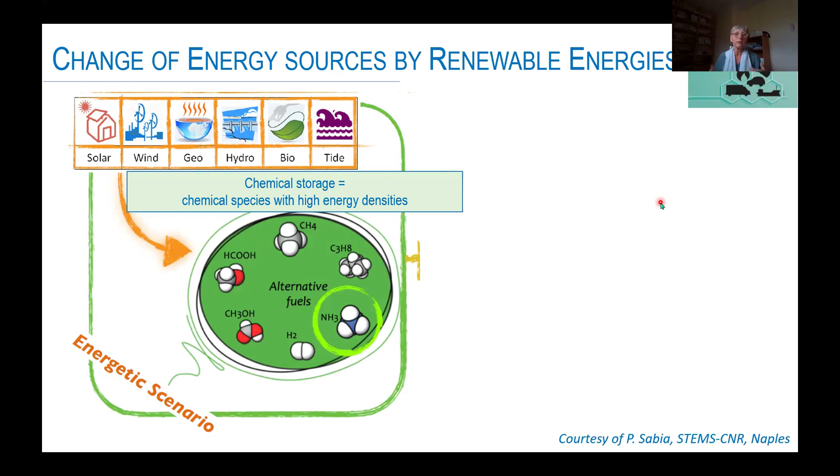So all of you certainly know that chemical storage is very beneficial, because in the chemical species we have high energy densities. From that, we can produce through water electrolysis or some other process that still needs to be developed. We can produce hydrogen or other alternative fuels that we call usually e-fuels, and ammonia is one of them. So the idea, sure, is that from ammonia we can retrieve the hydrogen content and use ammonia only as an energy, as a hydrogen carrier.

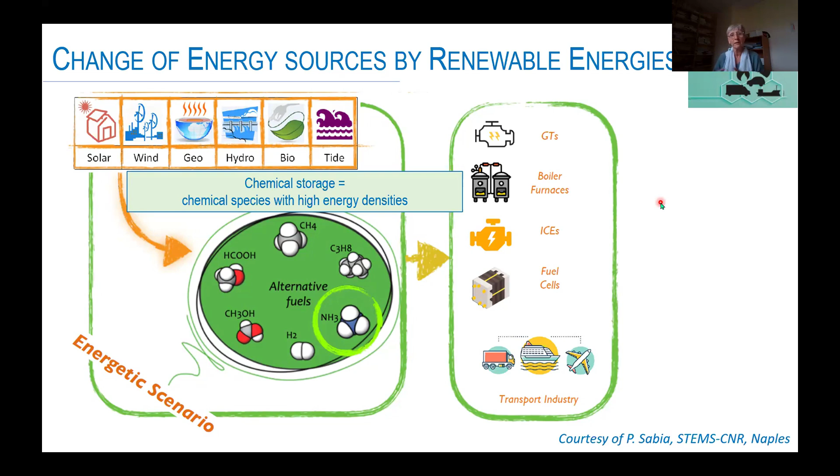But our objective from the combustion community is to use ammonia itself as a fuel. It could be in gas turbines, in boilers or furnaces, internal combustion engines, and there is also some development in order to use ammonia directly in some solid fuel cells.

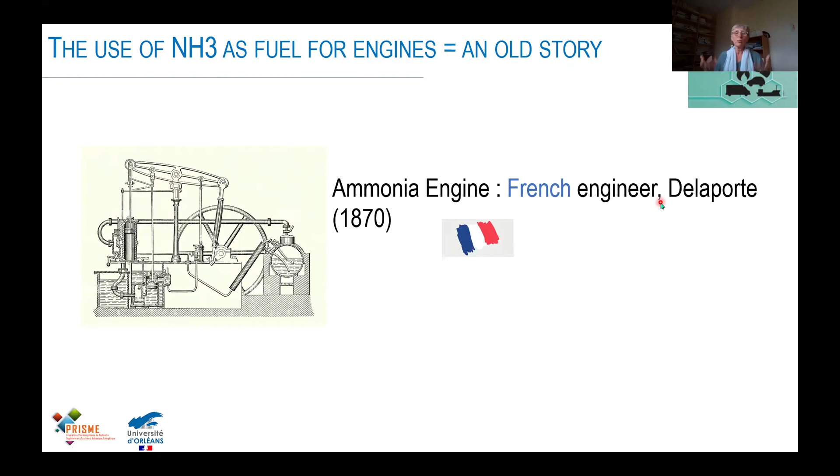Okay, the use of ammonia as fuel for engines is in fact an old story. So first we will start with a small joke. This was the first ammonia engine, developed by French engineer Delaporte during the 19th century. But as you can see, there is no combustion. It's only due to the change of phase between liquid and vapor and the increase of pressure to produce energy from this thermodynamic machine. So what happened since then?

In fact, there were several projects on ammonia thermal engines over the last 90 years, mainly mixed with a reactive fuel. It could be gasoline, diesel, biofuel, DME, methanol. One famous story is about a Belgian bus company during the Second World War, where they filled their engines with a mixture of ammonia and coal gases, so synthetic gas. They ran more than 10,000 miles, but sure, you can imagine it was a long time ago, so we have no real idea about efficiency, no real idea about pollutant emissions.

So we have to wait until 2010, more or less, when a pickup was developed by Michigan University, where they filled their car with a mix between ammonia and gasoline. Between these two dates, in fact, there was a lot of study during the 60s...

...done by US laboratories and also the Department of Energy, in order to know how it's possible to use ammonia as fuel. After that, there's another example, very famous in Korea, with AMVeh cars. It was also ammonia-gasoline or ammonia-diesel, it depends. And at the same time, there was one first Toyota car developed, Marangoni Toyota. More recently, there have been other initiatives, like Hydrofuel Incorporated, to use ammonia for automotive applications.

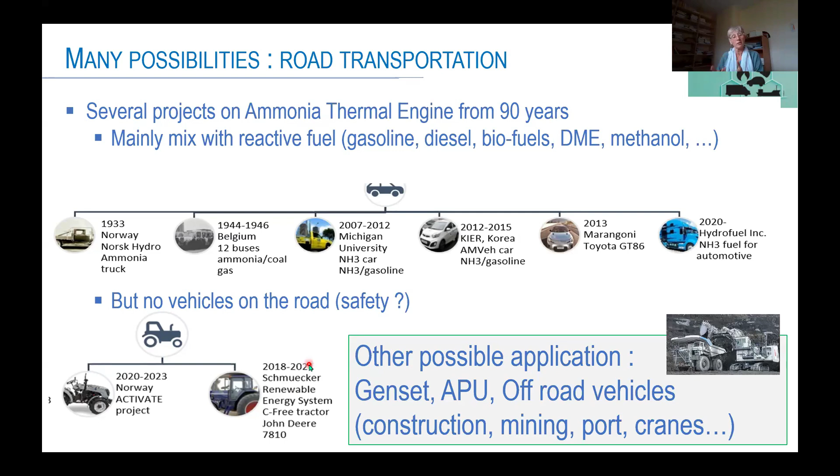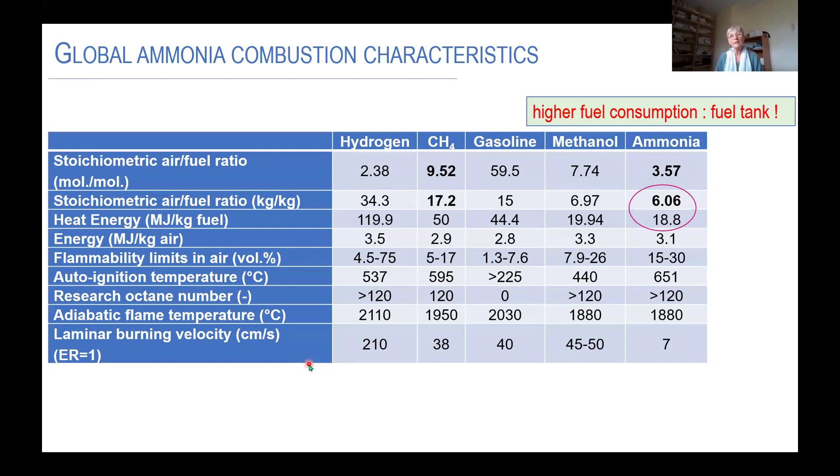Okay, what are the global ammonia combustion characteristics? They are not so good, especially if we look at the heat energy in megajoules per kilogram of fuel, which is very small in comparison to what we get with hydrogen or gasoline. But due to the small stoichiometric air-fuel ratio, if we consider the engine application per kilogram of air, the energy we can have at input could be really similar to what we get with gasoline.

About the research octane number, we can see that it is very high, with also a high auto-ignition temperature. This is good because it will limit knock occurrence, even with high compression ratio or high turbocharging conditions. But the high auto-ignition temperature makes it very difficult to use ammonia in compression ignition engines. We can also see that the adiabatic flame temperature is slightly 200 degrees Celsius lower than hydrogen itself. This is good because we will decrease thermal NOx, but what happens about fuel NOx itself?

Last, most people talk about the laminar burning velocity problem with ammonia, as it is very small - 7 centimeters per second in comparison to 40 centimeters per second for hydrocarbons. How can we improve this flame speed? Do we need to improve it?

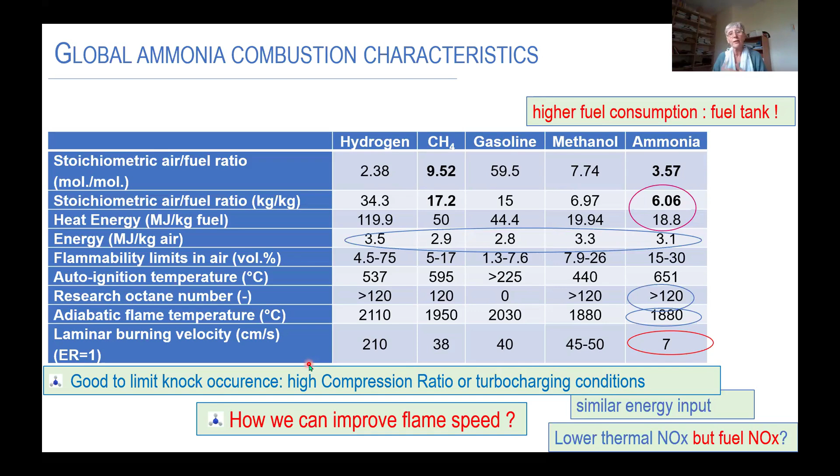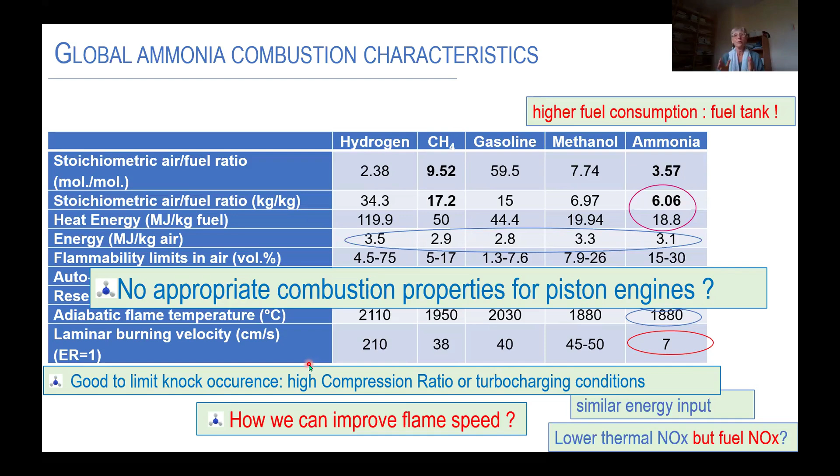Okay, so it's clear that there are no appropriate combustion properties for piston engines. So how can we use it as fuel? In fact, there is a lot of challenge to obtain a very clean and efficient ammonia engine.

As we see, it is difficult to ignite, so this will have a strong impact on cold start. It's a big issue, but it's an important issue when we have a vehicle on the roads. So we need ignition strategy, promoters, pre-chamber ignition.

There is a narrow flammability limit, so perhaps we will have some more problems with stability operating conditions. I mentioned slow flame propagation, so this will have a quite similar impact. And also, what about the fuel-bound nitrogen - what will be the consequence on pollutant emissions?

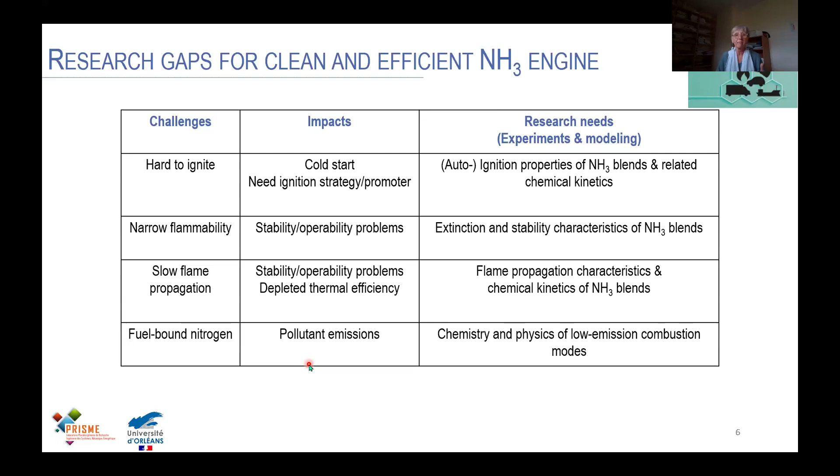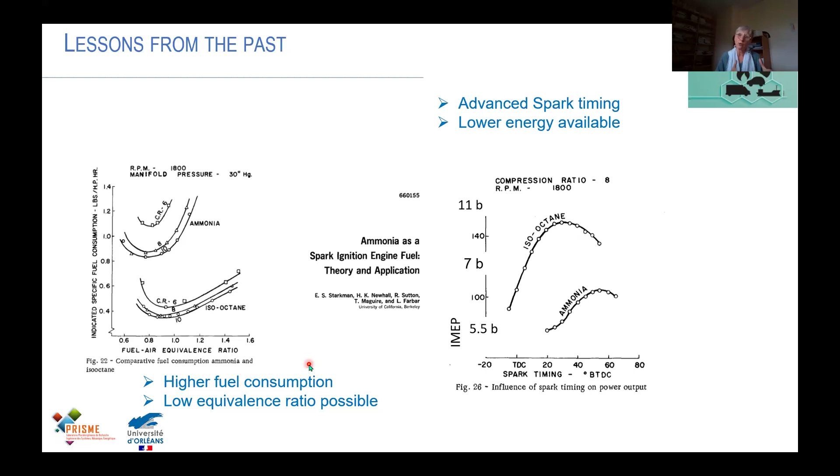It seems from the study that it is possible to run at low equivalence ratio, but due to the small flame speed, we need to advance the spark timing a lot. And also, it could be a problem as a function of the compression ratio.

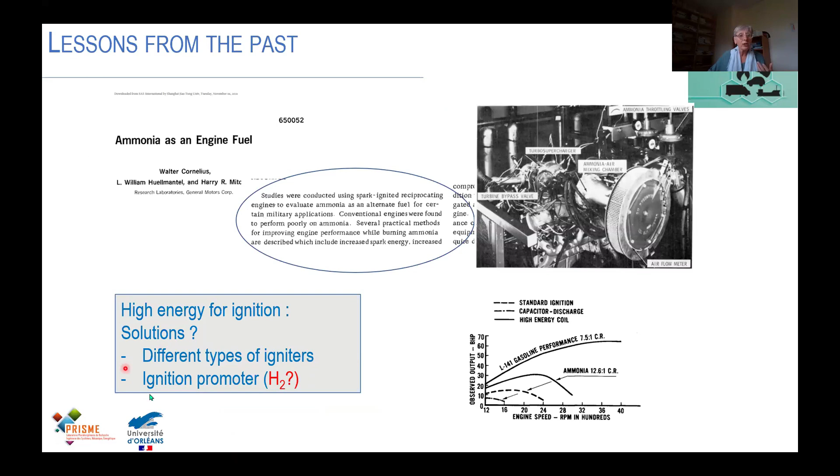So what could be the solution for ignition? Different types of igniters, ignition promoters like hydrogen additions.

Globally, they try to increase the compression ratio to enhance combustion, and it's a good result. With the increase of compression ratio, we can increase combustion efficiency as a function of different engine speeds.

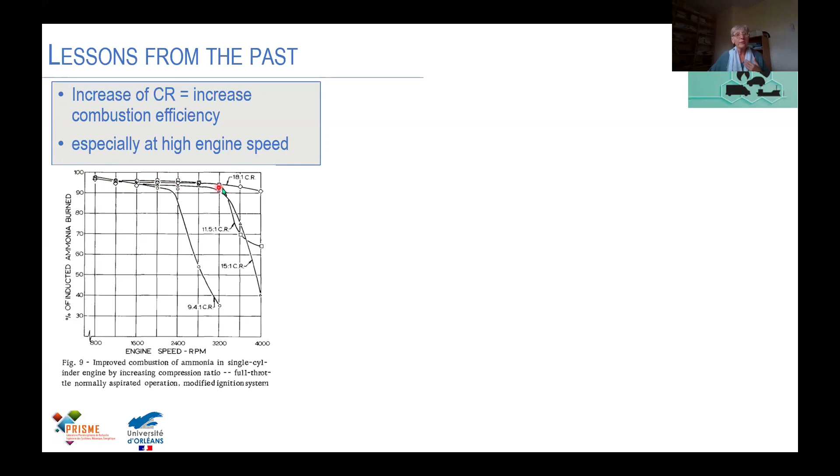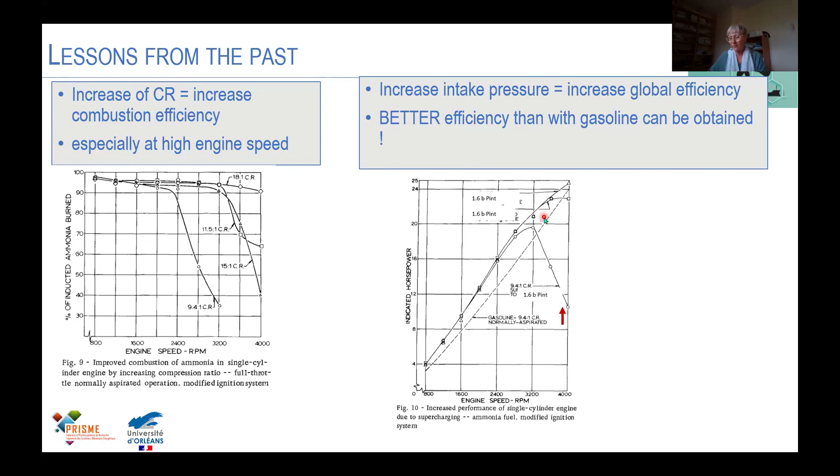If we increase the intake pressure, we also increase the global efficiency, and better efficiency can be obtained in comparison to gasoline itself. Okay, but why are we so interested in ammonia engines now?

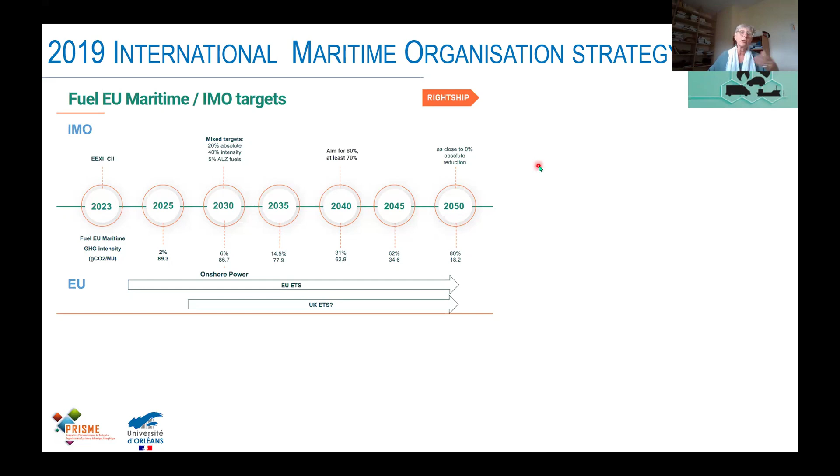In fact, in 2019, the International Maritime Organization set their first strategy in order to decarbonize the maritime sector. So the target is clear: by 2050, to be as close as possible to 0% of CO2 emissions.

This means that, in fact, they have to change their fuel. And there are different studies on different perspectives. What will be the future maritime fuel in 2050? There is a kind of one scenario, and what we can see, ammonia will be one candidate.

It is not so easy because until now, there are not so many. There is a lot of ammonia, but it is for fertilizer. So first, we need to provide more ammonia. And also, as you know, the way to produce ammonia is not until now very green. But anyway, it will be for the future. So certainly not before 2030 or 2040, we will have ammonia as fuel for marine engine.

It is an example provided by MAN Energy Solutions at a conference, where we can see that in the future on our sea, in fact, we have different fuels as a function of the ships, as a function of the travels, as a function of their functions themselves.

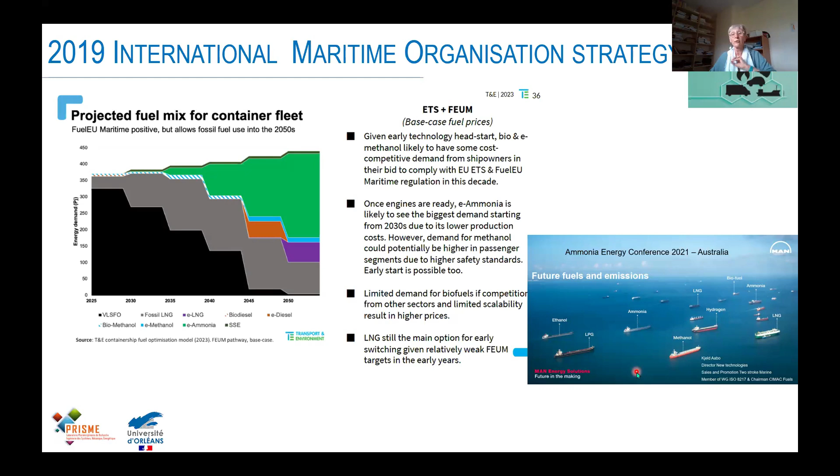So if we look at what's happening now about marine engine development, there are different announcements. The first one was from Wartsila with a 2 and 4 stroke project. Another one is WinGD, to convert to methanol or ammonia itself. MAN already developed a 2-stroke ammonia engine, and they work also on 4-stroke. And more recently, HiPower System in Asia succeeded, in fact, in making an ammonia diesel engine with 20% diesel content. If we look on the website, there are a lot of announcements.

It's clear that ammonia will be the fuel for the future, and this will be a revolution. But we also have some new examples about tests that will be done in Germany in order to power trains with ammonia. And also, certainly, you know that there is a recent announcement that GAC will provide on the road the first ammonia car engine, and this was also announced by Toyota itself, that our new ammonia engine will bankrupt the entire EV industry. So we never know what will happen, but this is very positive for the ammonia economy.

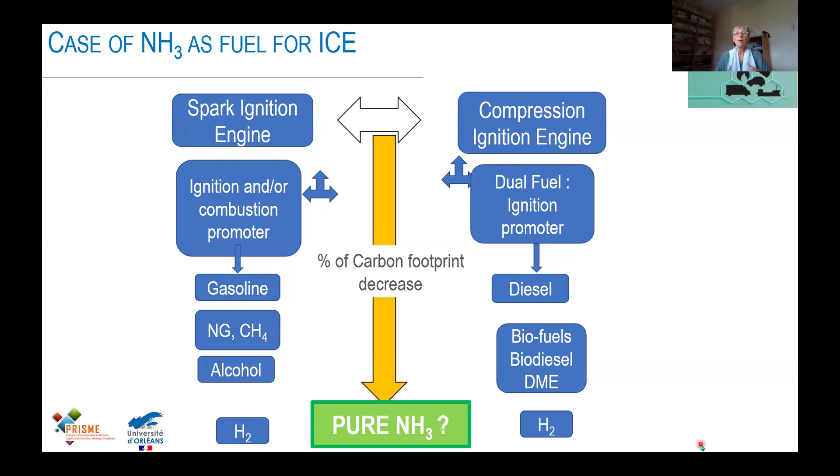So we looked until now at the global combustion parameters, but what about the minimum ignition energy? It is a recent study where they try to measure the ignition of ammonia, nitrogen, ammonia-hydrogen mixtures. So here it's 100% ammonia, and they add some contents of hydrogen. We can see that as we increase hydrogen, in fact, there is no issue. We can decrease a lot the minimum ignition energy that we need, between 100 millijoules to 1 millijoule. So the difference is so big with only 20% of hydrogen.

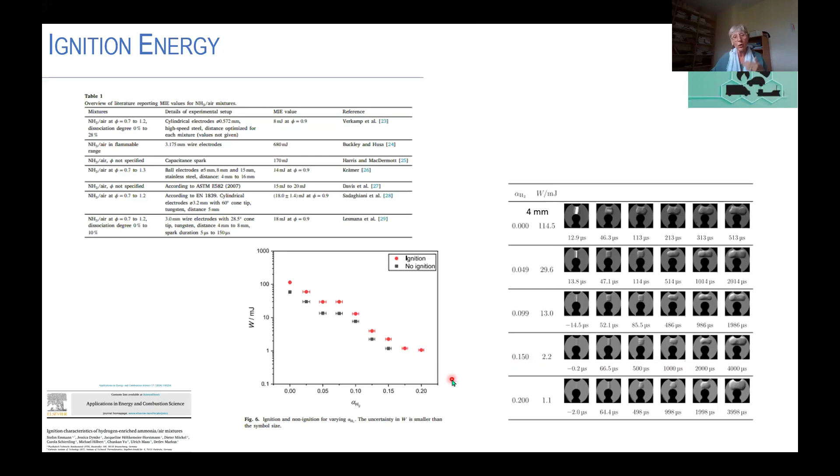If we look at the laminar flame speed, we can improve this flame speed by adding some other fuel like methane or hydrogen.

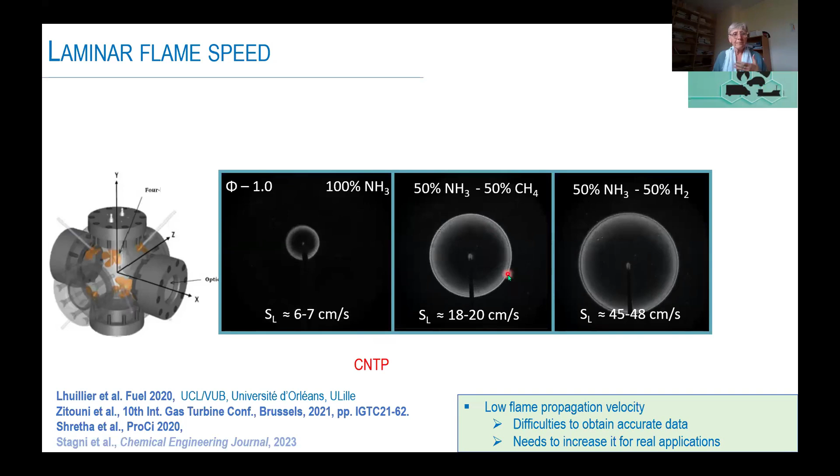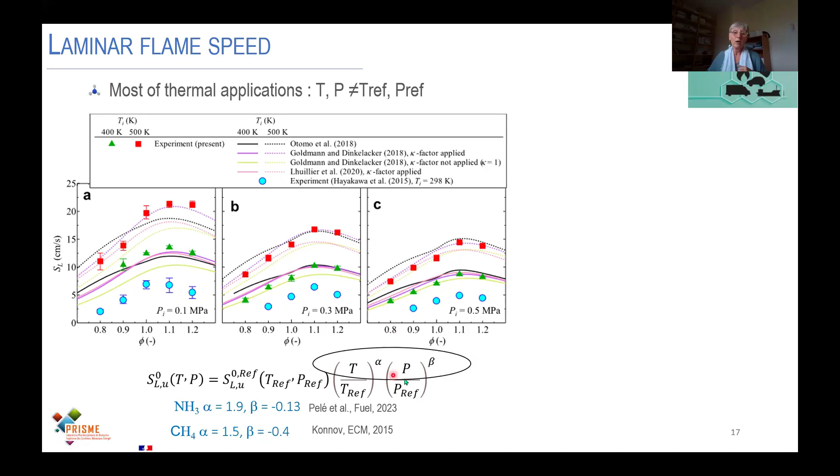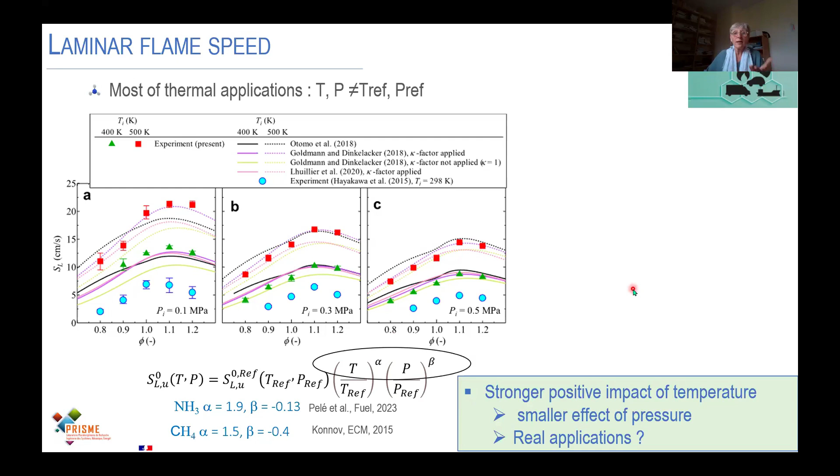But what happens in an engine, in fact? In an engine, what we can see here is for one bar, 3 bar, and 5 bar, and there is for 400K, 500K. As you know, in fact, the laminar flame speed is a function of temperature and pressure. And what we can see, in fact, is that this coefficient for the temperature dependence and pressure dependence is not similar to what we have for hydrocarbons. The dependence on temperature is higher and the pressure dependence is lower. So the consequence is, in fact, in an engine, as we have high temperature and high pressure, it could be totally different than what you get with hydrocarbons.

And also, from another study, what we can see is that when we increase the compression ratio, so when we simulate, in fact, the laminar flame speed at the ignition timing, we can see that even for a compression ratio of around 10, in fact, the laminar flame speed is strongly enhanced. And we are not so far, finally, from what we get with methane.

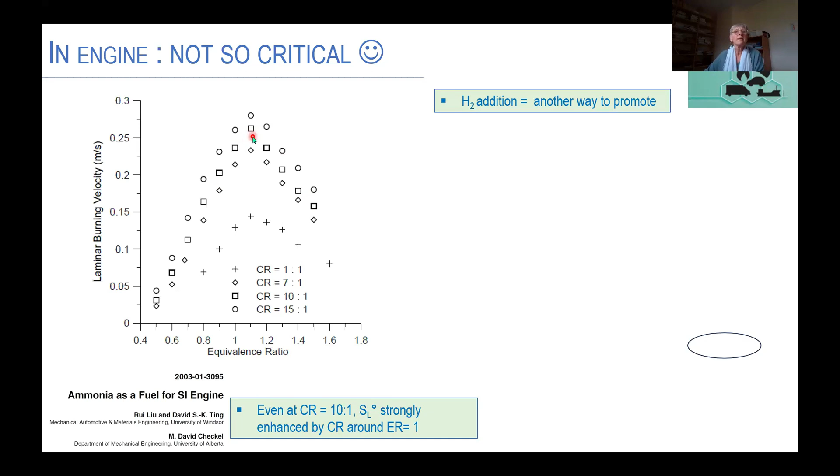With hydrogen addition, sure, it's an easy way, perhaps, to promote ammonia if we consider that we can bring around the engine a small cracker to partially crack ammonia to provide the right amount of hydrogen that we need to ignite and to improve, in fact, the laminar flame speed. This is the solution that Toyota adopted, in fact, to develop their engines. We can see here with 30% in volume of hydrogen, we reach a similar laminar flame speed to methane.

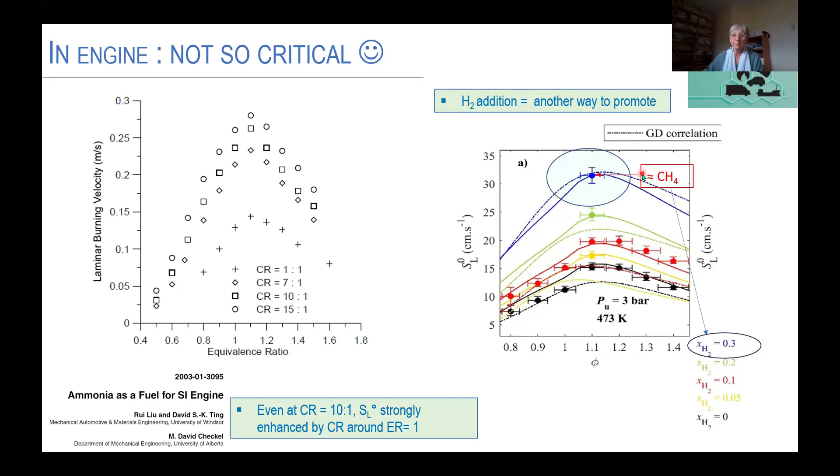Another parameter that could be interesting is the quenching distance, which will change the flame wall interaction, and this can affect also the heat losses at the wall.

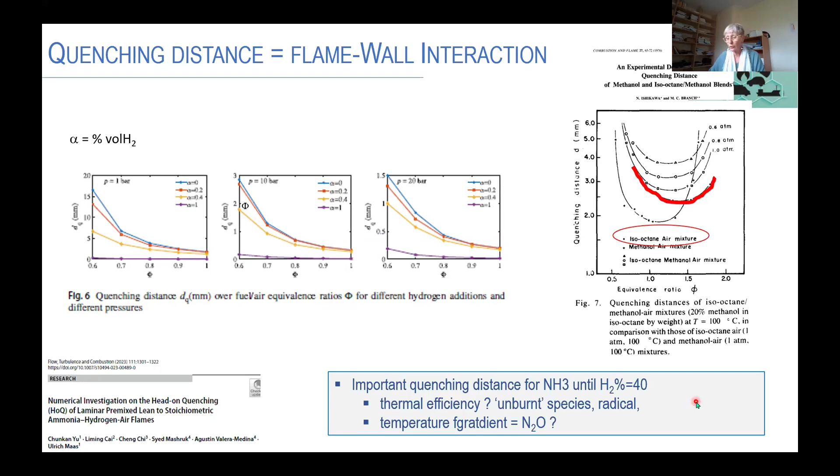What about the thermal efficiency? Unburned species, radicals, and temperature gradient will also induce N2O emissions. So the question remains: what are the best conditions to use ammonia?

When I consider 95% ammonia, or 80%, or 60%, or 70%, this works - we know we can do it. But when we want to really consider an ammonia engine, we have different ways to do it.

We can use ammonia in gaseous or liquid phase, port fuel injection, direct injection, or a mix of both. We can add an onboard cracker to add a small quantity of hydrogen, or inject hydrogen itself. We can use a spark ignition engine or compression ignition engine, but as I already told you, it will be difficult to auto-ignite ammonia, so we need to add a reactive fuel with a pilot injection.

What about the load as a function of RPM? Because we have different types of vehicles between marine ships and cars, the RPM will be very different. We have some trouble about cold start, and trouble about the ammonia-NOx trade-off.

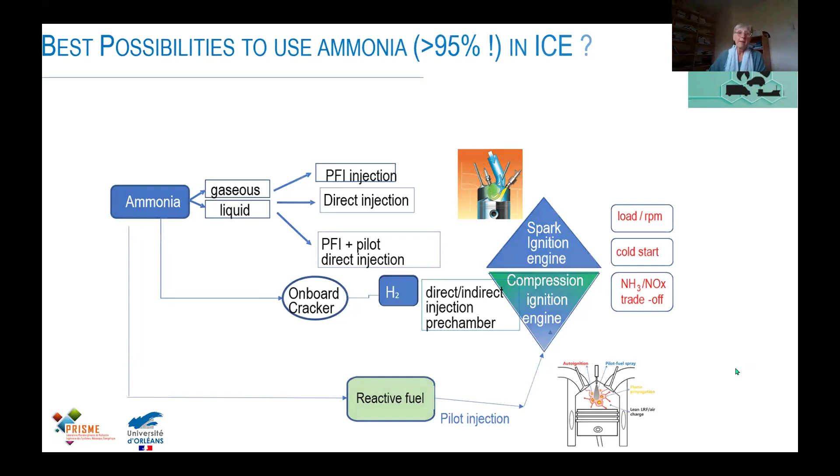So what's about the impact of engine architecture for an ammonia engine?

Our objective first was to do some assessment about combustion, ignition, stability, efficiency, and pollutants for pure ammonia as well as possible. The idea was to identify the minimum amount of hydrogen needed to have a very good engine.

We did also some other studies to see the possibilities of using other fuels like ethanol, methanol. We focused also on cold start conditions as a function of low speed, low load, and the effect of compression ratio, piston chamber design, diesel type versus spark ignition engine, identifying the limit on trade-off NOx versus NH3, and also to have an idea about the global warming impact through N2O emissions, as the global warming impact of N2O is 300 times that of CO2.

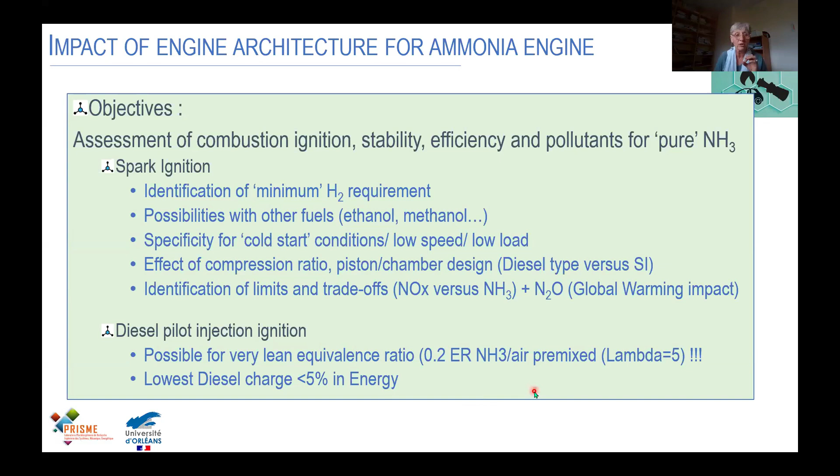We also looked at the possibility to ignite ammonia with a diesel pilot, and we will see that we can ignite until very lean equivalence ratio, 0.2, of ammonia-air premixture, with the lowest diesel charge below 5% in energy.

So first for that we used a GDI engine. We changed nothing, and the compression ratio was only 10.5. We don't change the piston geometry, we don't change the compression ratio itself, and we use the current igniter also.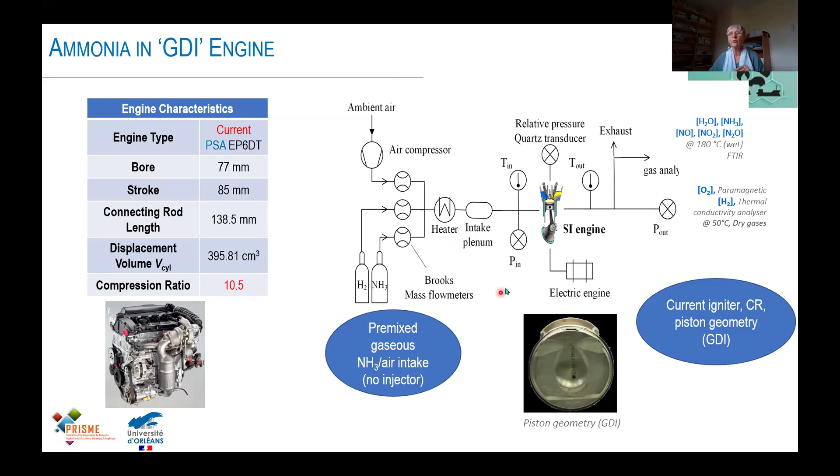What we did, in fact, was a fully premixture between ammonia and air, or ammonia, hydrogen, and air, through the intake plenum and a heater.

First, it's very interesting to see that, as a function of intake pressure, we can run pure ammonia - it was possible even at atmospheric pressure. There is no real difference in IMEP with or without hydrogen, and the maximum work was obtained at slightly rich conditions, 1.05.

And if we look at the example at 1.1, 1.2 bar of intake pressure, we can see that we obtain similar IMEP to what we can get with CH4.

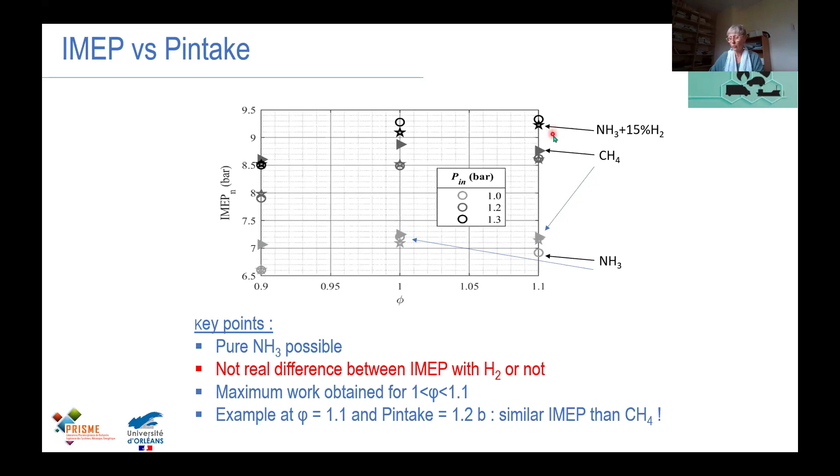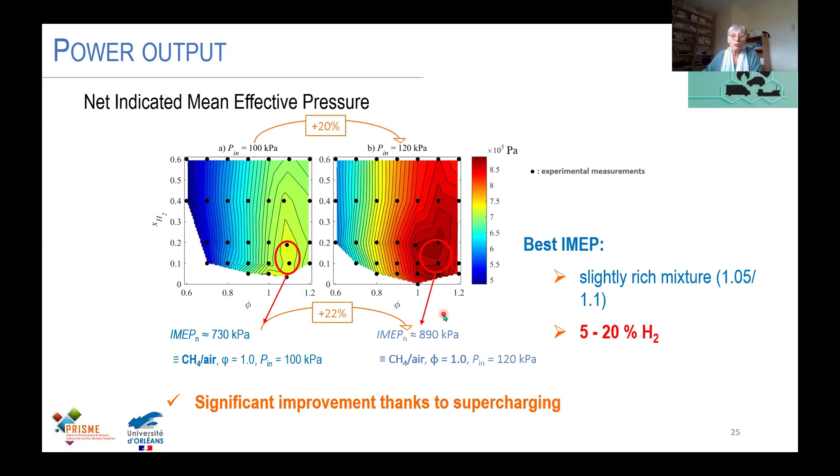This is quite similar, but it is a map as function of the quantity of hydrogen for different intake pressures. We can verify that a slightly rich condition seems to be better to get maximum mean effective pressure. Also, when we increase the intake pressure by 20%, we increase the IMEP by 22%. So it's better with turbocharger conditions.

About the indicated efficiency, unfortunately the maximum is not when we are slightly rich, but when we are slightly lean. The efficiency is more or less between 35%, and we can get up to 38%. So it's really comparable to what we have with conventional fuels.

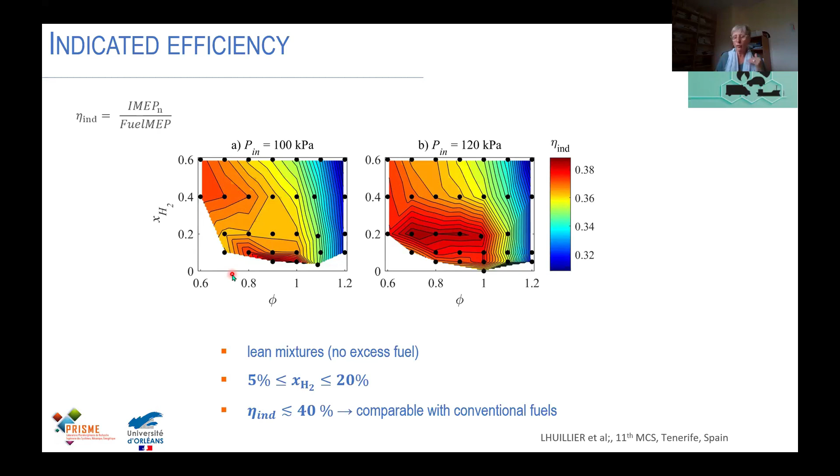What about the emissions? Here we have the emissions of unburned ammonia, and here the emission of NOx. They are plotted as a function of the equivalence ratio.

This is the point for 100% ammonia, where we can see we have a lot of exhaust emissions. When we add 5% hydrogen, as expected, when we decrease the equivalence ratio, we decrease unburned ammonia. But even in lean mixture, the unburned ammonia quantity remains important, about 1%.

About NOx, it is the opposite: NOx increases with the decrease of the equivalence ratio. When we add more hydrogen, we decrease strongly ammonia emissions, but we also increase strongly NOx emissions. So we have a small emission window, like between 0.7 and 1, where perhaps we can get the optimized ratio between NOx and ammonia.

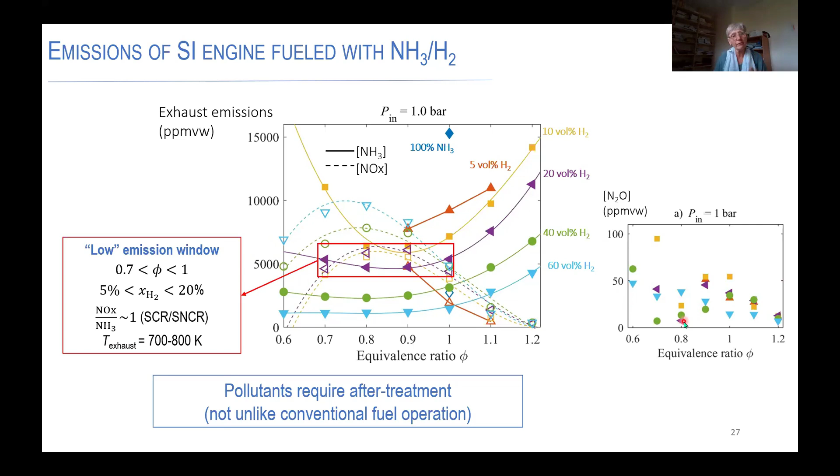About N2O, we can see it remains always below 100 ppm, and also decreases with the equivalence ratio. But even 50 ppm is too much if we consider the global warming impact. So I think we have no choice - we need development of after-treatment solutions, and it will be not really different than what we get with conventional fuel operating conditions.

We had hydrogen, and saw what we can do with it. But what happens if we use a compression ignition engine and add a spark plug, because the idea is to use a higher compression ratio? It will be better for ignition, better for flame propagation, and also less expensive since we can retrofit current diesel engines.

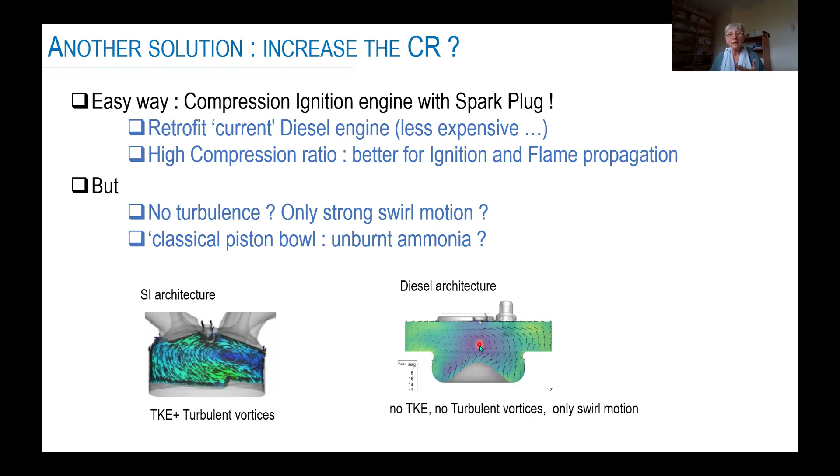But as you know, the main difference between spark ignition engine and diesel engine is that there is no turbulence, only a strong swirl motion. What happens in this case for unburned ammonia? First, we compare both engines - they are more or less similar, the unique difference being compression ratio in the combustion chamber itself.

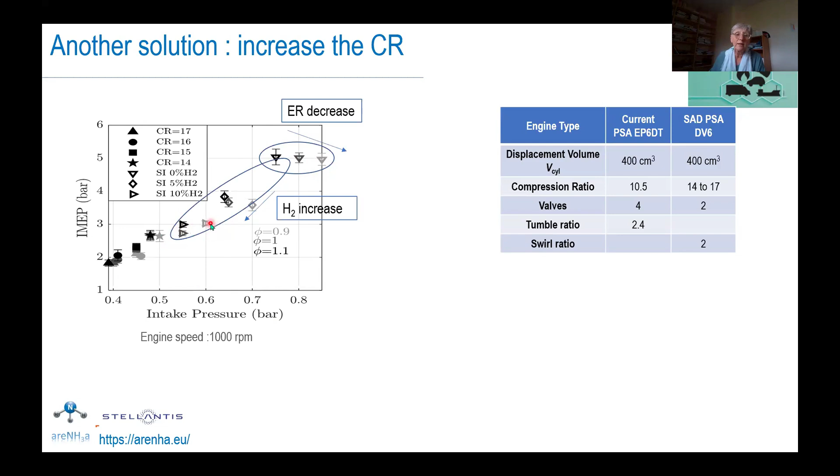So this is for spark ignition engine. What we see is when we decrease the equivalence ratio, we decrease a little bit the IMEP, for sub-atmospheric intake pressure, so for low load. What's interesting, when I add hydrogen, I can go to lower load, to reach cold start conditions, but they are limited. Even if I add more hydrogen, I cannot go to lower load, and the effect of equivalence ratio remains not so significant.

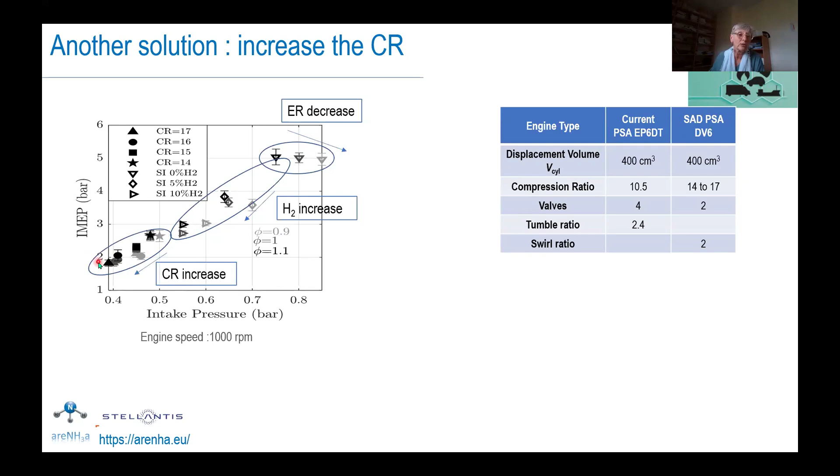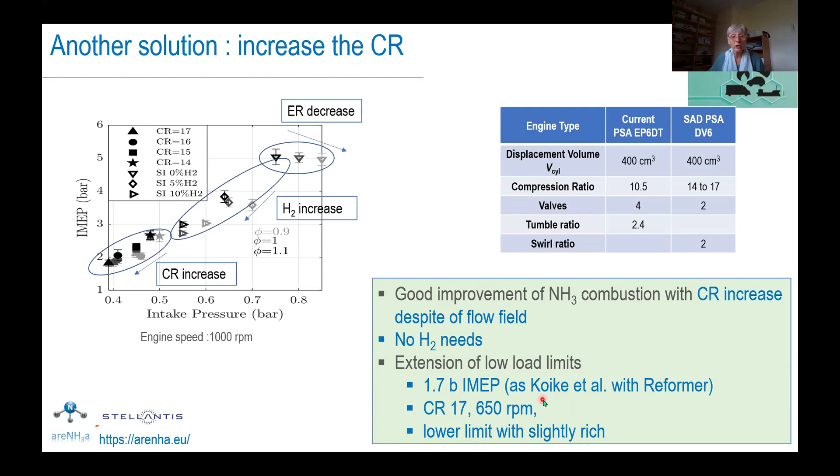When I increase the compression ratio by changing the engine, I can reach very low load conditions. This is very good for cars or trucks - a good improvement of ammonia combustion with compression ratio increase despite the flow field. No hydrogen is needed; I can start the engine straight away with ammonia itself, and we can extend the low load limit until 1.7 bar IMEP, as Toyota did 2 years ago with a reformer. There are also good low load conditions with low RPM.

It remains a little bit strange to see what's happened in this kind of engine due to the flow field itself. If we look at the flame, we can see we have a beautiful, weakened premixed turbulent flame. There is no two-phase combustion as we can have with a spark-assisted diesel engine with gasoline. It's only premixed flame propagation, with no difference between the spark ignition engine and the spark-assisted diesel one.

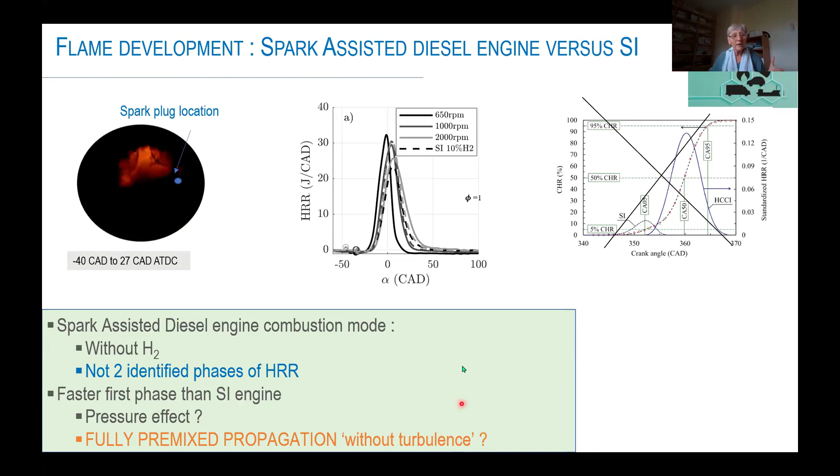So what happened? How could the combustion be fully premixed propagation without much turbulence effect? We tried to see what happened because we have a higher compression ratio, so the conditions at spark timing are slightly increased in terms of pressure and temperature. But the consequence on the laminar flame speed and ignition delay remains similar to only 2% of hydrogen. This cannot easily explain why it is better.

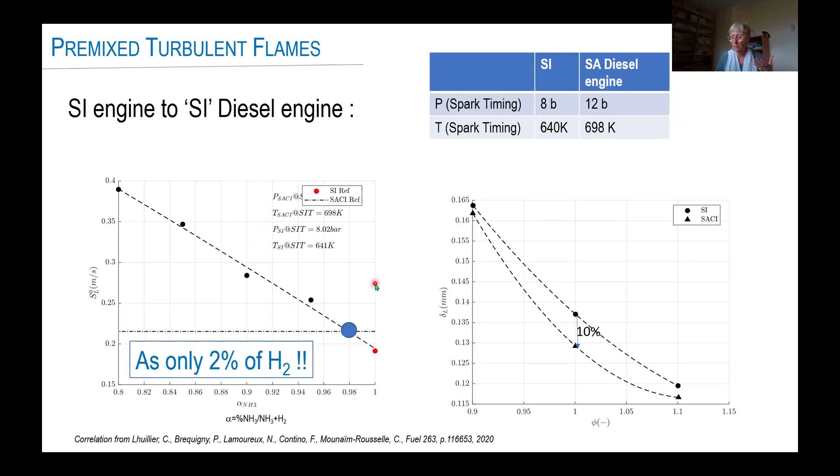But if we look at the development of the turbulent flame in the case of ammonia, turbulent flames of ammonia are more wrinkled than what we get with a methane flame or hydrogen flame. When we go with a diesel engine, we come back to the corrugated flamelet regime, which is not the case when we use the spark ignition engine, where we were more or less near the broken reaction zone.

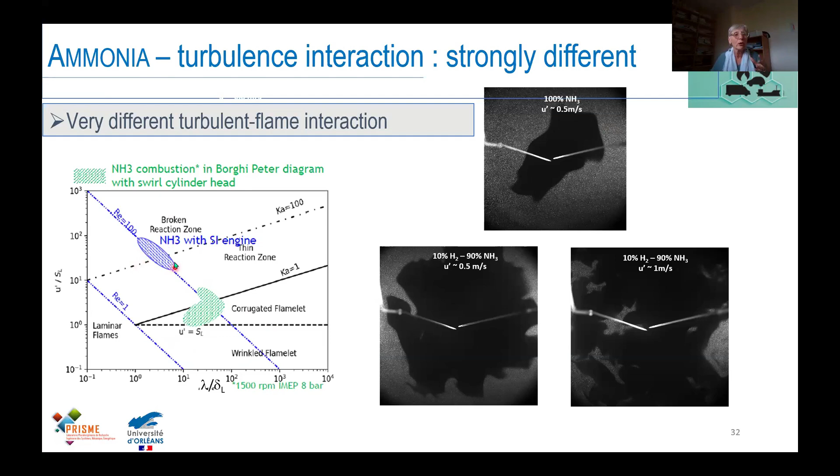About the unburned emissions, unfortunately using a diesel type engine increases a lot the unburned ammonia due to the squish zone, and we can have up to 2%, up to 4% unburned ammonia. This is totally unacceptable. What's also interesting is that at stoichiometric or slightly rich conditions, we also have hydrogen emissions. This is important, even though many people don't consider it, because of what we can do with this hydrogen in the exhaust port.

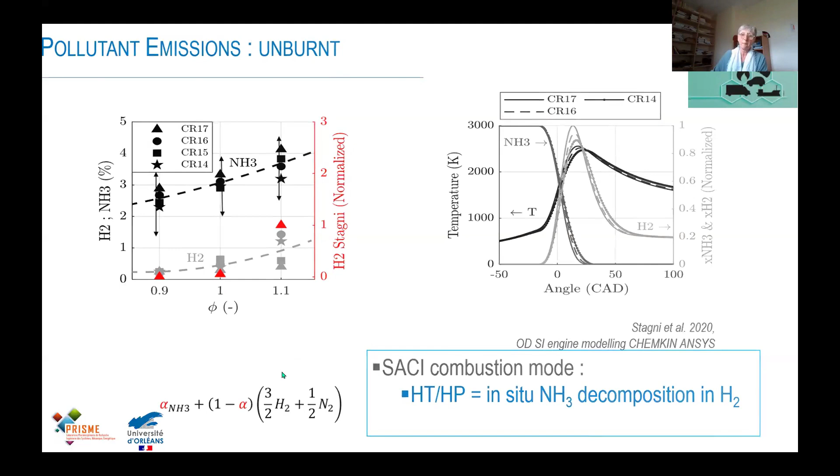So we tried to improve ammonia combustion. We can improve it by changing the igniter itself. This was nice because with a highly performant, efficient igniter, we don't need to go to this high compression ratio, and we can get the lowest IMEP achievable with 4% hydrogen at high engine speed.

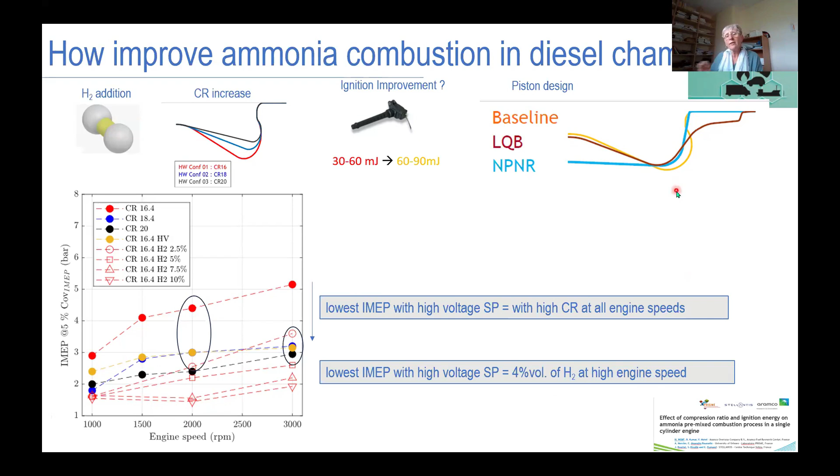So it's an advantage. But also, how can we decrease the unburned ammonia? For that, we did a study with Aramco by changing the shape of the piston bowl. In yellow is the baseline, conventional diesel reentrant piston bowl. In red is the low quench bowl, designed to favor flame propagation and avoid the squish zone flame quenching. There's also a blue one designed to minimize the heat losses in this area.

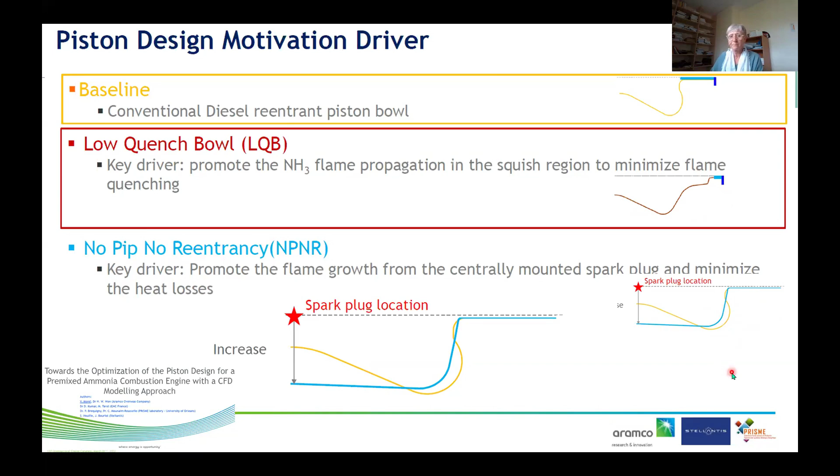Here it's the fuel consumption and some specific flame propagation durations, like ignition and total combustion development, or the first part of combustion development versus total combustion development. It's totally incredible because, against what we expected, the baseline piston reported the best fuel consumption. So in fact, it is not better even when we change these shapes.

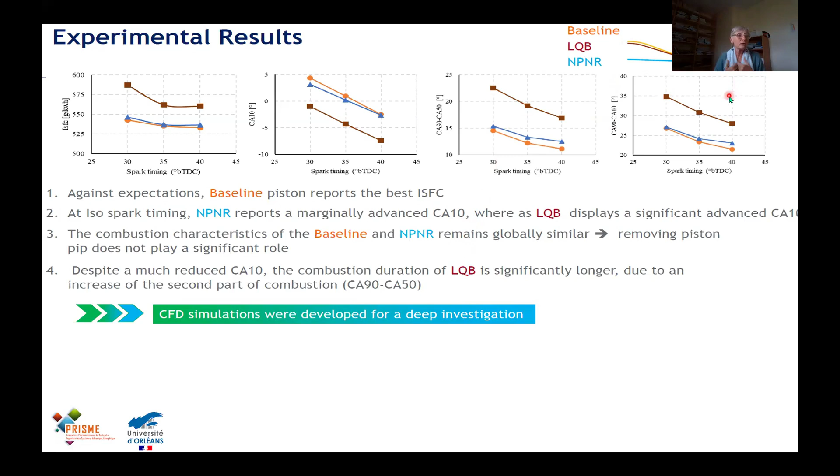The blue one did report an advance, but not a lot. What's more important is the advanced beginning of combustion with this shape, which is what we expected, meaning less quenching of the flame. But anyway, between this shape and the blue one, it's more or less similar, so it seems that removing this part doesn't have a significant role.

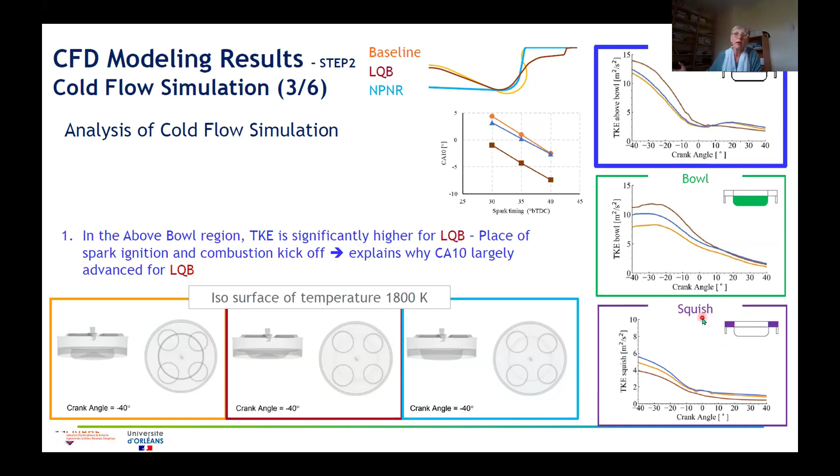So they did some CFD modeling with Converge to see what happened. We looked at the turbulent kinetic energy, which is significantly higher with this type of piston shape, just above the bowl and in the squish zone, which has a lot of impact on unburned ammonia. In this case, for the squish zone, as expected due to the shape of the piston, we have lower TKE.

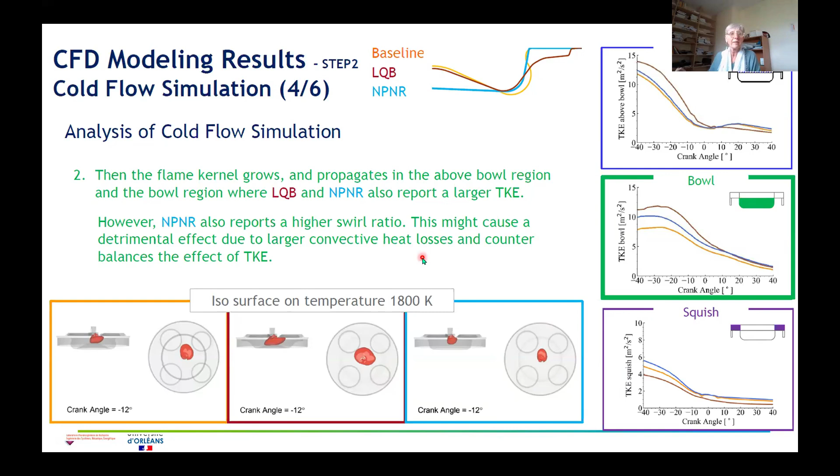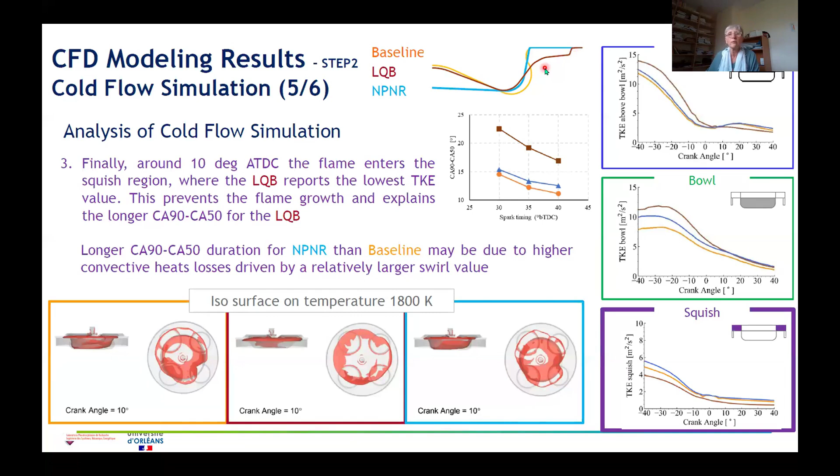If we look at the end, when we are in the squish zone, we can see that 10 degrees after top dead center the flame enters the squish zone, and when we are in this shape, it means less flame quenching.

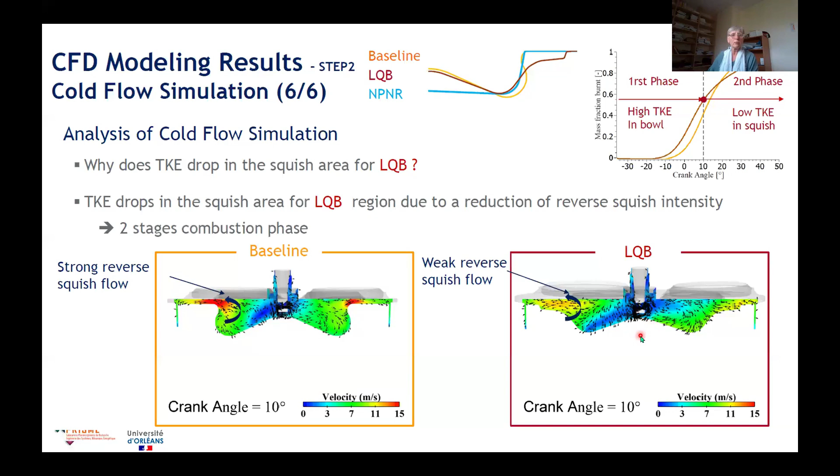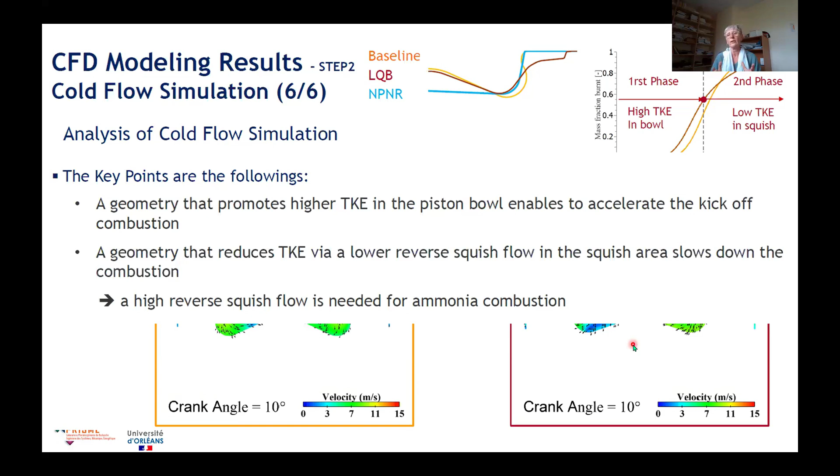If we look at the CFD simulation, it's clear that from both types of bowl, we have a reversed or not reversed squish motion. So the conclusion is that a geometry promoting higher TKE in the piston bowl accelerates the beginning of combustion, but a geometry that reduces TKE via a lower reverse squish flow in the squish area slows down combustion. This high reverse squish flow is needed for ammonia combustion, and this is really different from what we expected.

Anyway, I told you that high compression ratio is very good. So what about knock occurrence?

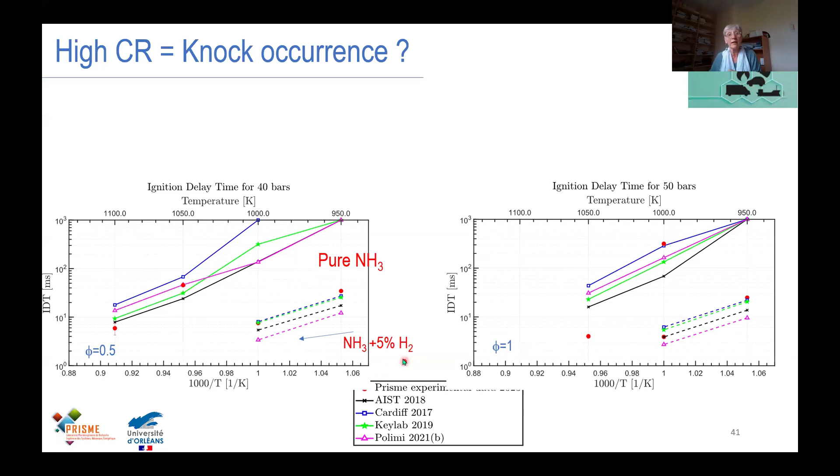First, if we look at the ignition delay for 40 bar and 50 bar that we measured recently, for pure ammonia or for ammonia plus 5% hydrogen, it's clear there is a big gap between these two fuels, no issue, it's a big gap. So certainly we expected more knock occurrence with small additions of hydrogen than with pure ammonia.

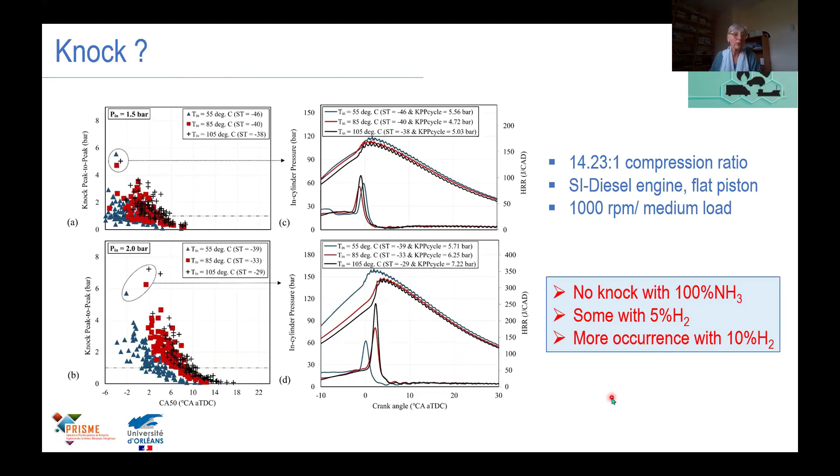So we did some experiments with a relatively small compression ratio, only 14, at 1000 RPM, medium load. We can see we have knock, sure, but we never have knock with 100% ammonia. We have some knock with 5% hydrogen and more occurrence with 10% hydrogen. This gives an idea of the knock frequency we can get. Here it's 1.5 bar of intake pressure; if we increase the intake pressure we can obtain knock.

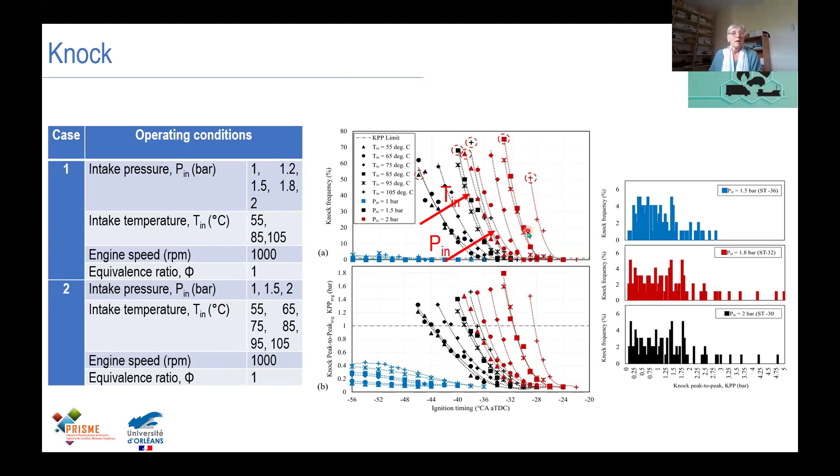But to predict knock, the question remains about ignition delay prediction through kinetic mechanisms. So we tested 40 kinetic mechanisms. For different equivalence ratios, we measured ignition delay at different pressures, from 40 bar up to 70 bar.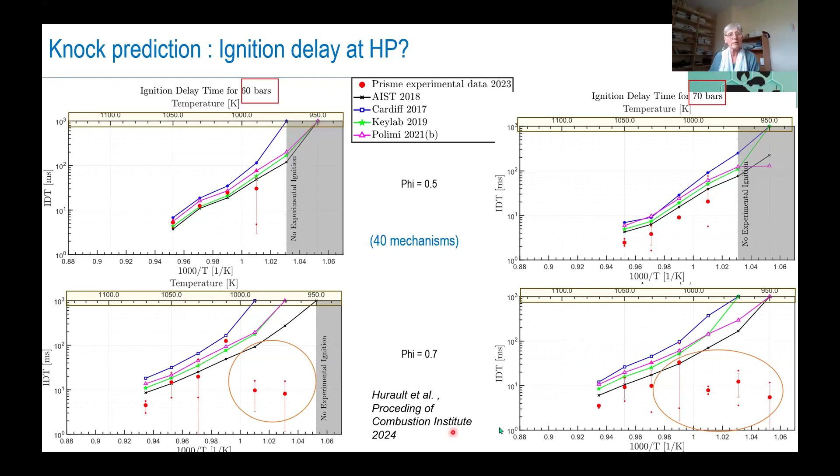Before concluding, I want to show you a comparison between spark ignition and pilot reactive fuel ignition, using the same engine at 16.4 compression ratio. We don't change the Bosch injector, the common rail injector, and we try to minimize the diesel content by optimizing engine stability. The injection pressure was 200 bar. For the spark ignition comparison, we try to set the ignition timing to obtain the same CA50.

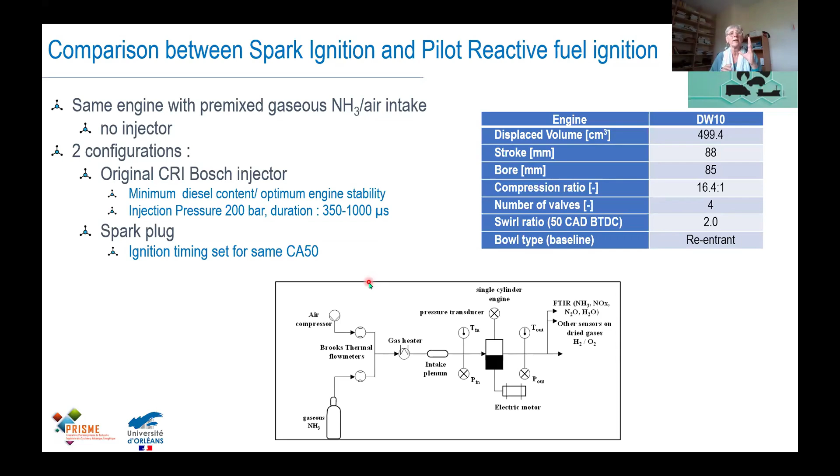What's interesting is the minimum diesel energy fraction needed to ignite the ammonia engine at 16.4 compression ratio. We could stay below 2.5% energy share by diesel content until an equivalence ratio of 0.4. This is relatively very good because we don't need a lot of diesel energy content. We can ignite down to an equivalence ratio of 0.25, which is really lower than the flammability limit, and much lower than the equivalence ratio limit we can get with a spark ignition engine.

In spark ignition, we cannot go below 0.75.

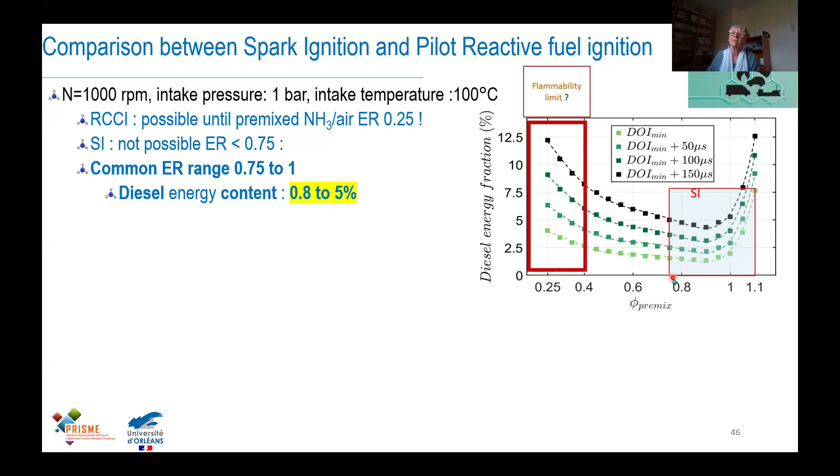About indicated power, there are some small differences due to the energy content, but this is not so important. What we obtain is not only due to the diesel fraction, because the diesel fraction remains only 2.5%, so it's not due to that. It's mainly due to better combustion efficiency, and we also have longer combustion duration with spark ignition, so there is a strong enhancement of combustion itself with diesel ignition.

Not really due to the turbulent spray, because don't forget it's only 200 bar, so it's very low injection pressure - the turbulent motion and entrainment of air has to be relatively low. So it's really due to local mixture fraction between non-reactive and reactive regions, like in RCCI engines.

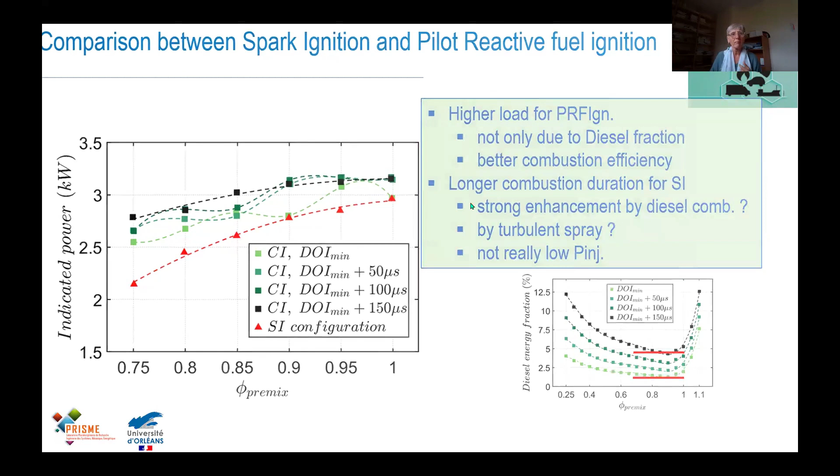So the last important question: what about emissions for the ammonia engine?

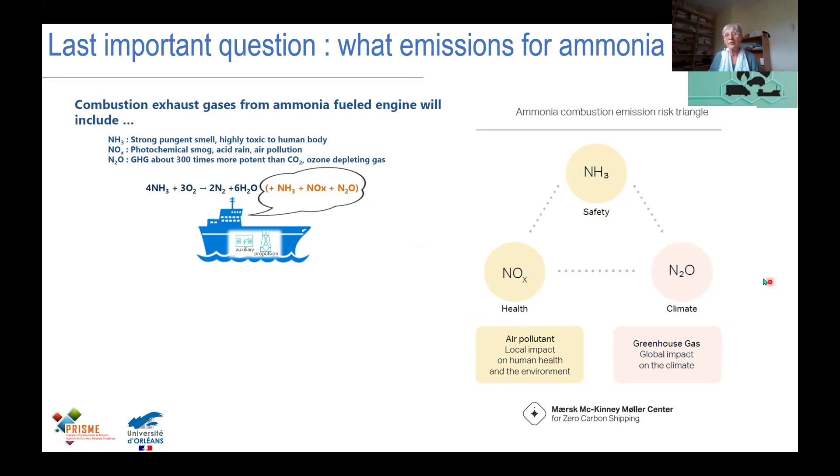Combustion exhaust gases from ammonia fuel engine will include NH3, NOx, and N2O, as I already told you. This is true—it's the triangle for ammonia combustion, the risk triangle. NH3 is about safety problem, NOx is about health, and N2O will be the impact on the climate.

About premixed ammonia in spark ignition engine, we can draw something like that. As a function of the equivalence ratio, we know that we will have unburned ammonia in the rich zone, and certainly hydrogen, like we can have CO in hydrocarbon engines. And in the lean side, we will have NOx, but NOx with ammonia is not exactly at the same equivalence ratio. The peak is not at the same equivalence ratio as what we get with natural gas.

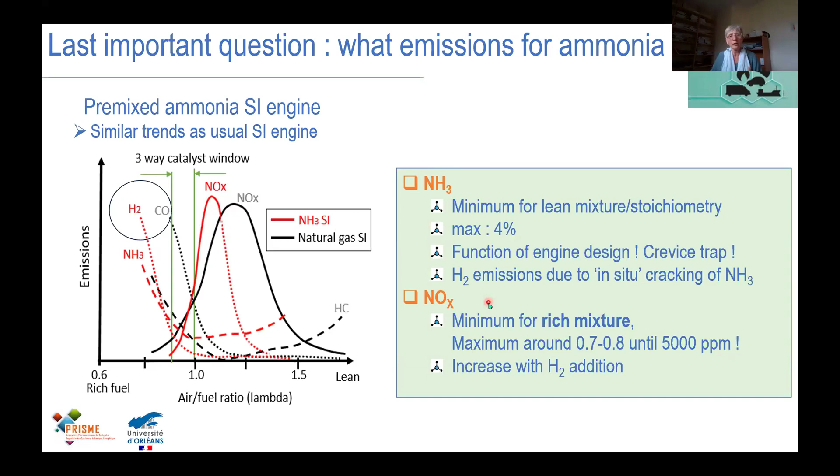Moreover, the minimum for unburned ammonia remains a function of the engine design, as I showed you. And also we have to consider hydrogen emission itself due to the in situ cracking of ammonia. Minimum for rich mixture, maximum about 0.7 to 0.8 equivalence ratio for NOx—it could be until 5,000 ppm, so this is really important. And unfortunately, NOx emission will increase with hydrogen addition.

What about when we ignite with decane, so with a diesel content? In fact, NH3 is similar between a diesel ignition or spark ignition engine—it remains the same content, and it will be a function of combustion chamber design. About NOx, we can see that we produce more NOx with spark ignition than with diesel ignition itself. This is due to the fact that the temperature will be more homogeneous, as we have a more homogeneous mixture, so the temperature will be higher.

About N2O, it seems that in fact we have similar N2O content when we are around the equivalence ratio, and perhaps we have less N2O emissions when we ignite with decane. This has to be verified, because N2O measurement is not so easy at the exhaust port, as it is a very small quantity. So anyway, if we put it in an equivalent of CO2 or global warming impact, it seems that finally diesel ignition is not worse than spark ignition.

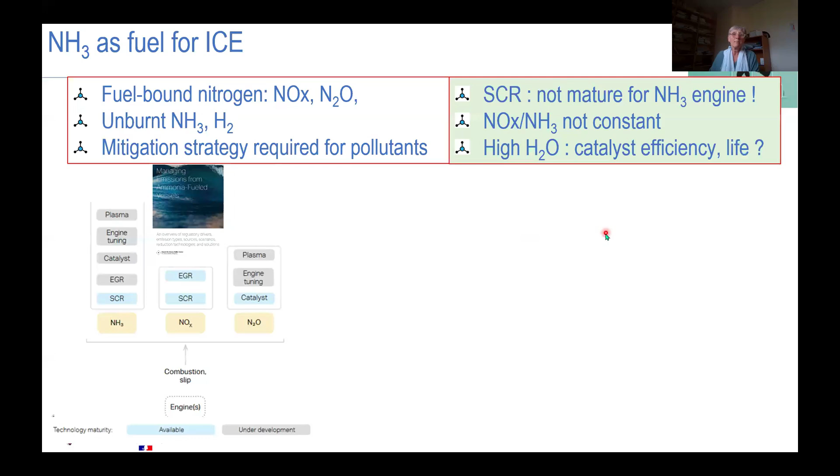So we have NOx, N2O, NH3, H2—we have to find a strategy to mitigate these pollutants. There are some advertisements that say, oh, no problem, SCR is available, EGR is available, we can do catalyst and blah, blah, blah. It's not true from my point of view. SCR are not mature for ammonia engines; they are mature for diesel ones.

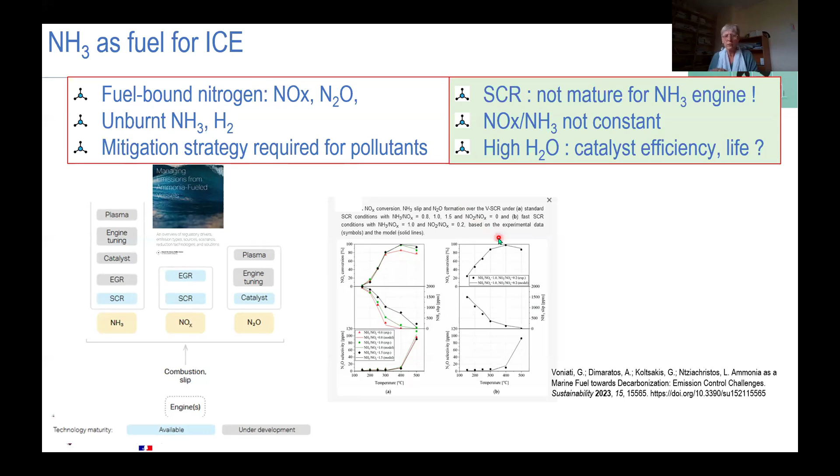The NOx divided by NH3 ratio is not constant, so perhaps we have to inject ammonia again. Also, we have to consider that there is a high amount of water in the exhaust gases, between 28 and 30%. What about the catalyst efficiency? What about life? There are now new studies starting to see what happens as a function of the water content, as a function of the ratio between NH3 and NOx, and as a function of the ratio between NO2 and NOx. In ammonia combustion there is no real problem with NO2—it's very, very small. So anyway, there is some technical challenge, but there are still some scientific challenges we have to answer.

Especially what's about the auto-ignition behavior of ammonia under elevated conditions and also with blends. We tested 40 kinetics mechanisms, and some of them are perfect for pure ammonia, some of them are perfect with 5% hydrogen, but they are not the same.

What about, in fact, the flame stretch and ignition behavior for pure ammonia or blends with ammonia? We still need to enhance the knowledge about flame propagation, the effect of combustion promoters, the effect of turbulence, which is until now not well known and needs to be investigated in models, and also the stretch effect. And sure, we have a lot of things still to do about the emissions—chemical kinetics modeling, investigating low emission combustion modes like RCCI.

I didn't talk to you today about the challenge to inject liquid ammonia spray, but there are some challenges, not only due to the high latent heat of vaporization, but also due to the vapor saturation pressure, where we have a strong flash-boiling process that can occur inside the injector. This will change, in fact, the atomization mode, and this also changes the predictability that we can have with classical atomization models. Thank you.